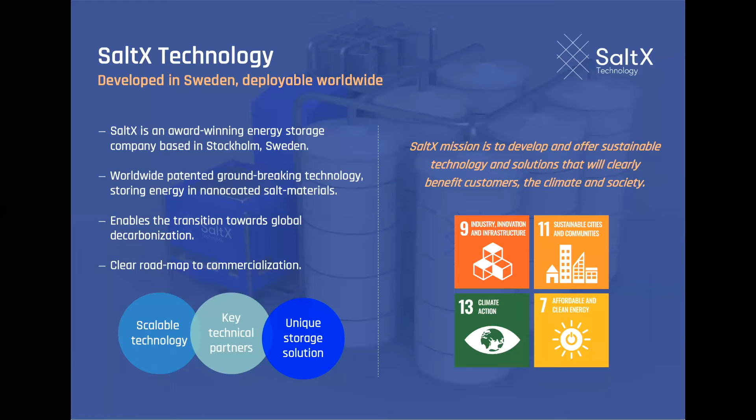The first quarter has been a lot of actions, and a lot of things have happened. We have certainly been very busy in various areas. The latest one that we have sent out a press release about is that we have decided to build a new energy storage in Luleå. We have actually signed an MOU agreement with Luleå Energy, Luleå Kraft, and Swerim, and we're going to build a 1 megawatt size energy storage with a capacity of 15 megawatt hours.

And this will be done after we have finalized the Stockholm energy storage that I will come to later on also. So before we have finalized Stockholm, we already know what to do after Stockholm. We are very happy about this, because this is also the first storage installation that we actually charge with heat, waste heat, and that's a significantly good case for the climate, but also for the business case.

Secondly, we are one of 4 winners of the Helsinki Energy Challenge. As I mentioned in the beginning, more than 250 applications came into Helsinki city. It was actually the mayor of Helsingfors who was the initiator of this project, and we are of course very proud that we are one of the 4 winners. It had to do with how to make the best solution for Helsinki to be climate neutral by 2035, utilizing the assets that they already had and combining new technology, as we think we have, with a mature technology.

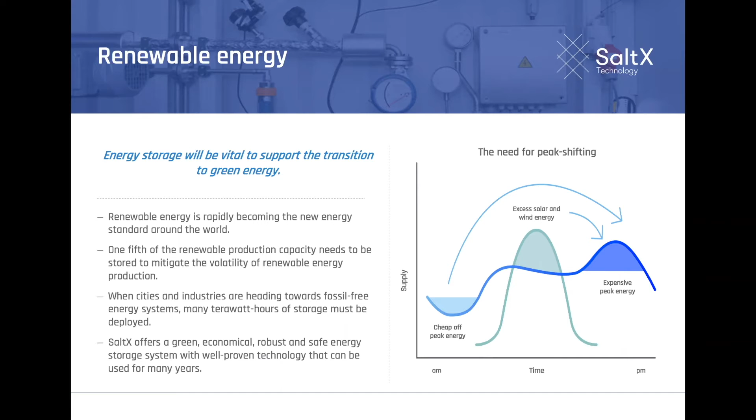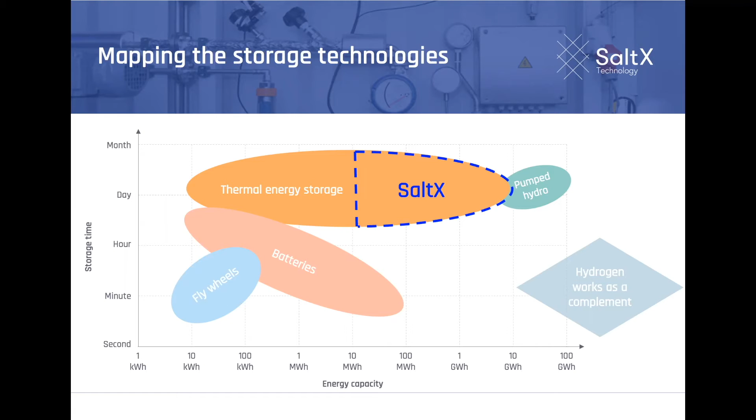Just to put us on the map of energy capacity and storage time, we are up on the right-hand side here. We want to store a capacity of 10 megawatt hours or more. That's our field, that's where we are best, and we can store the energy for hours, days, weeks, months, without losing anything. There are a number of technologies and different ways of energy storage, and we think there's not only one solution to cover the needs in the future, but we are really focusing on this side here. Yes.

How does this work then? It works like this. We have the calcium hydroxide. We put in energy in the form of electricity or heat, and we have a process at 550 degrees Celsius where the steam, H2O, goes away, and the calcium oxide left will be stored as the battery, you can say, and that can be stored as long as you want without losing energy.

And once you want to discharge, you add 120 degree steam, and you will have a quite explosive, not explosion, but a very, very fast reaction where you get out 450 degrees Celsius as energy. And that energy can then be used for making electricity or making heat, or both as a combination, as a matter of fact.

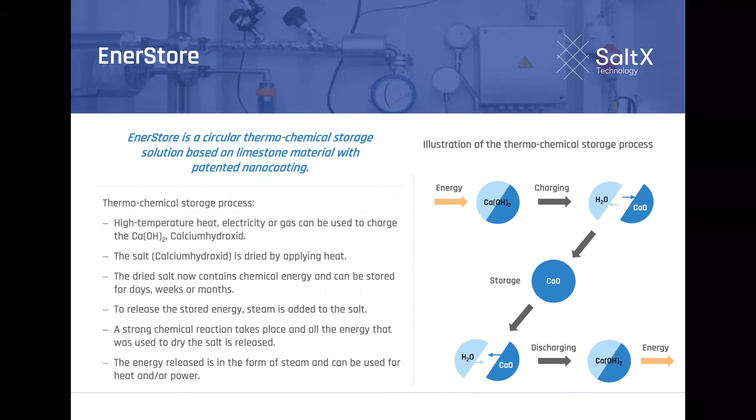We are working on 3 major product application areas. We have heat to heat. That is Lulea, where we charge with heat and we discharge with heat. And this is a very, very interesting segment of the industry. The target market is really steel, glass, and ceramics. And why is that? Well, that's the industry that has the high temperature that we need, 550 degrees. And we are one of the few, if not the only one, that can actually utilize this high temperature to create high steam value.

In the middle, we have the power to steam, and that is actually Berlin, where we are utilizing fossil-free electricity to charge the salt, and then we are taking out the steam to the district heating in Berlin at 120 degrees. To the very right-hand side, we see the power to power, and that is more of a concept at the moment, but the target is really that we need to get in contact with the grid operators and the wind and solar farms.

But there we are not yet. Heat to heat and power to steam is our main focus at the moment. It's really, really important that we take the total responsibility for every application area, and we are learning and building competence in our company.

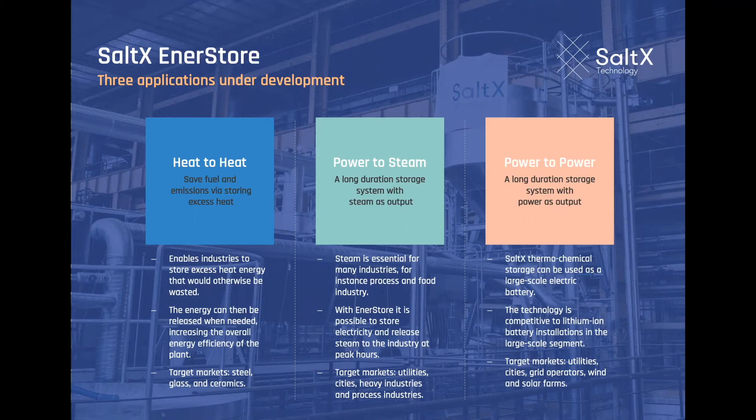Looking at the platform we have, this is the way it looks. We're charging with heat, gas, electricity, and as you see the charger reactor, that's a Calix reactor that is built so that you put the salt on the top and you heat it on the way down, and in the bottom you get out calcium oxide, which then goes to the charged salt silo. And once you are releasing it, you add the 120 degrees Celsius steam, and you can take out the heat and electricity.

In parallel with this, the process automation control system is very important to control this process, and that is certainly also an area where we are building competence and knowledge, because this is going to be very important. The charger, we work with Calix, as I said.

The discharging, we work with Sumitomo Foster Wheeler, a global, well-known, Japanese-owned Finnish company. Both Calix and Sumitomo are supplying the reactors to Stockholm, but they will also supply the reactors to Lulea later on. And as a base in this complete installation, we have the nano-coated salt, which is our core technical platform.

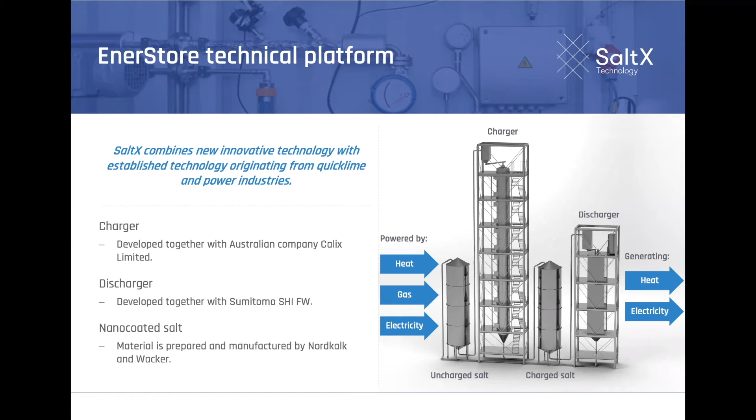Looking at Lulea, we call it a game changer, and I think it is, because utilizing the heat in industry is a somewhat untouched area, especially at this temperature range. And we know that there is a lot of waste in this area. We've seen figures of 120 terawatt hours as waste in Europe at 500 degrees or more, and that is really our target. Compared to the entire Swedish electricity use, it's almost the same. It's slightly more in Sweden, but it's in that range.

So we are building a pilot installation now in Lulea. We're going to build that after the summer, as a pre-step to phase number 2, and phase number 2 will then replace the oil they are using today in this steel production. We will replace 10 gigawatt hours in capacity of oil and replace that with Saltx. That prevents more than 3,000 tons of CO2 from polluting our air, and we have a more climate-friendly solution here.

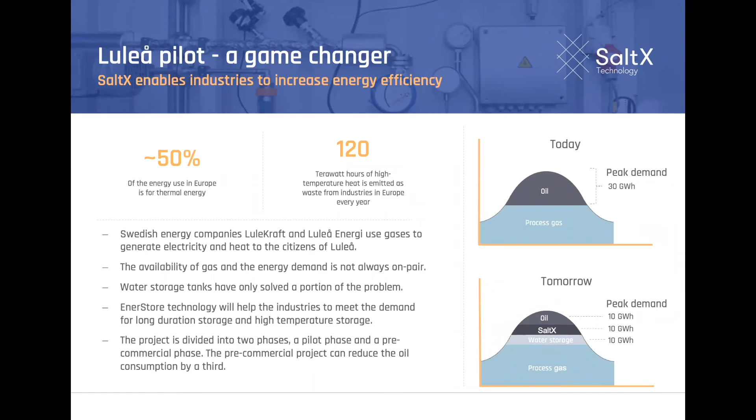The ecosystem, we showed that before. For the technical platform, we are using Nordkalk as a supplier, and Wacker as a nano-coating material supplier, and Sumitomo and Calix are the key suppliers for the reactors. Then we have application partners, as we call them, and Swerim is certainly one of them, and Enerco and Shangliang Boilers in China are application partners. Looking at power to power, there's nothing there, so we need to build that later on, of course.

But for heat to heat, we have these end customer partners, Lulea Energy and Lulea Kraft, which is very important and opens up a lot of new opportunities, we think. And for power to steam, we have Vattenfall, in particular Vattenfall in Berlin, but we also have an ongoing discussion with Vattenfall about other solutions, not only in Berlin; we also talk to them in Sweden about various opportunities.

The drivers for market growth, I think we see that in the news, in the papers and on social media every day, more or less, that things are happening in the right way. So we get a lot of energy from that, of course. The latest is maybe that Joe Biden took the US back to the Paris Agreement.

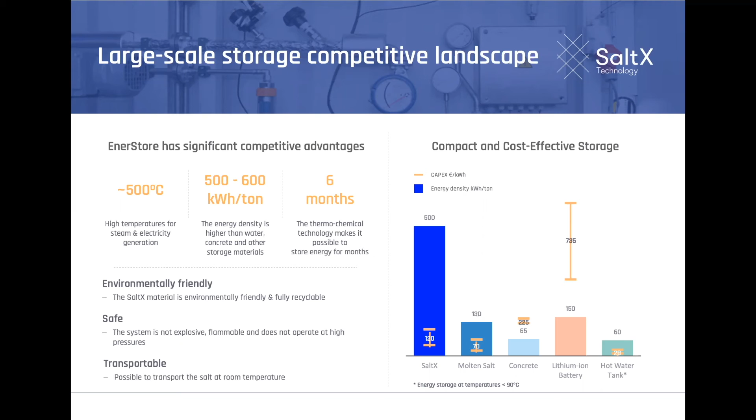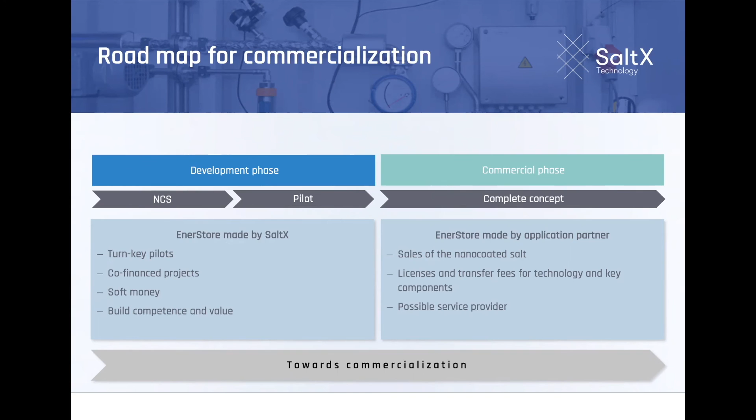I talked about Shanghai, Stockholm, Luleå. Now looking at 2023, we're building power to steam, heat to heat in bigger sizes, as you can see. And as you can see, that aluminium case here, that's also an opportunity that we are talking to some customers in, because they have the same temperature as the steel.

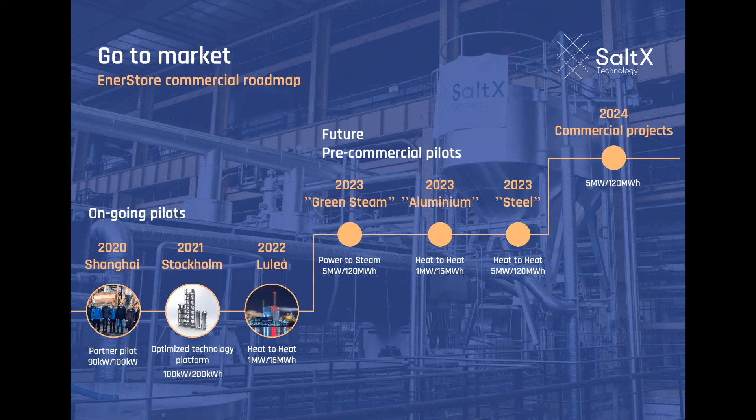So now I've talked a lot. Harald, you will say a few words about the key figures, financial situation. Yes, thank you, Carl-Johan. Referring back to what Carl-Johan has presented, one can note from our financials that our spending rate has increased during the last two quarters and will continue to do so.

So in addition to just funding the organization, financing the organization, the burn rate, we are now investing in Stockholm primarily for the steps in that pilot plant, and going forward to the latter part of this year, we will then go into financing Luleå.

We are depending on and relying on public funding as well, as we've done through the existence of our company, from the EU, from Energimyndigheten, and from Vinnova and others. But in addition to that, we will fund these pilots ourselves together with our partners to a certain extent also. And that's the major thing to understand from our key figures end of Q1. Okay. Time for questions and answers.

There's one question about Shanghai here. That was maybe from the first presentation. Yeah. But I don't know if I said that or not. But I mean the Shanghai Shangliang boilers, as they call it, they are building the pilot installations now, and they are in the final stage of building it, and they will start up the testing very soon.